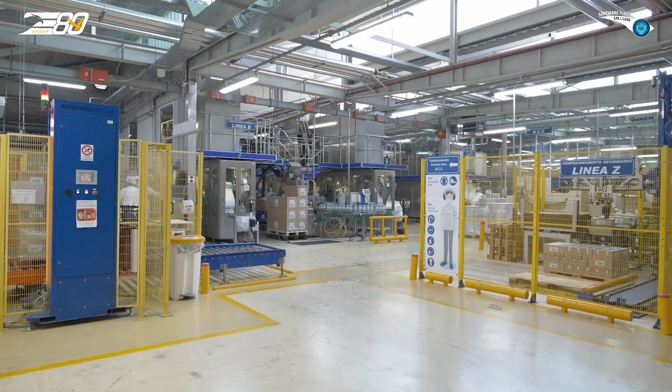The main objective of the project was to increase the production throughput with a flexible solution, integrated with our digital infrastructure, able to improve intralogistics efficiency, while also increasing the safety on site by reducing pedestrian-forklift mixed traffic. Additional challenges were to fit such solution in a rather small factory footprint, optimizing the use of existing space

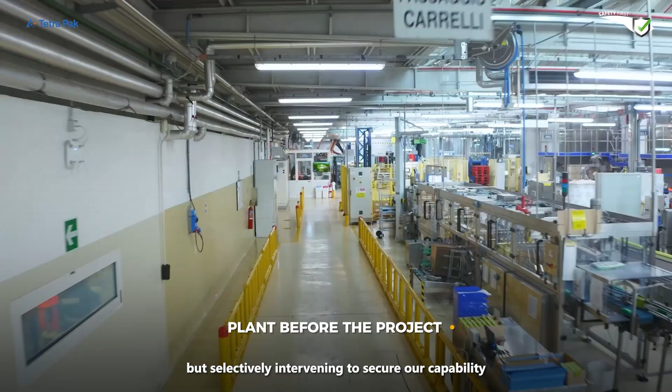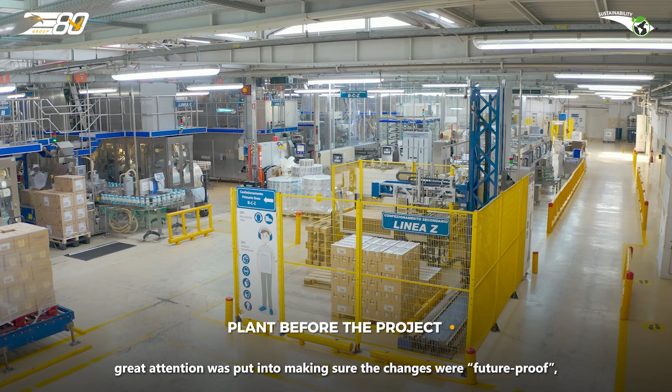and implementing the project without stopping production, but selectively intervening to secure our capability to keep serving our customers and consumers while transforming the site. It is important to highlight that during the design phase of the project, great attention was put into making sure the changes were future-proof, hence developing a layout able to sustain future growth in a logical manner.

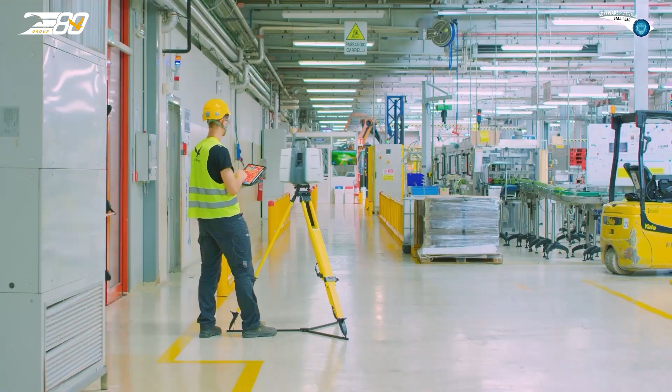Performance and efficiency improvement through innovation, automation and safety are the key elements that have driven the end-to-end solution project together with Abafoods. The complexity of the project needed an end-to-end teamwork involving our partner E80 Group since the preliminary study. Flexibility and adaptability to the situation were key to succeed.

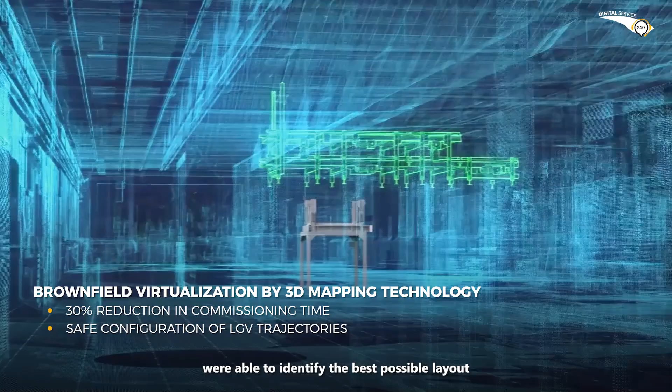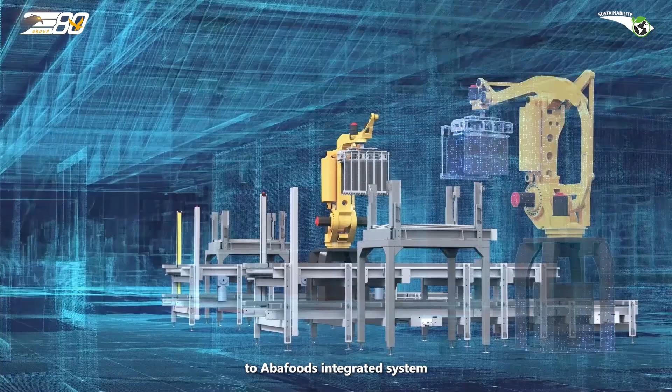The experience of our engineers, combined with the most advanced technology of 3D mapping, were able to identify the best possible layout. Besides, our collaboration with Abafoods and all the suppliers was key to deliver compact and efficient interconnected equipment to Abafoods' integrated system.

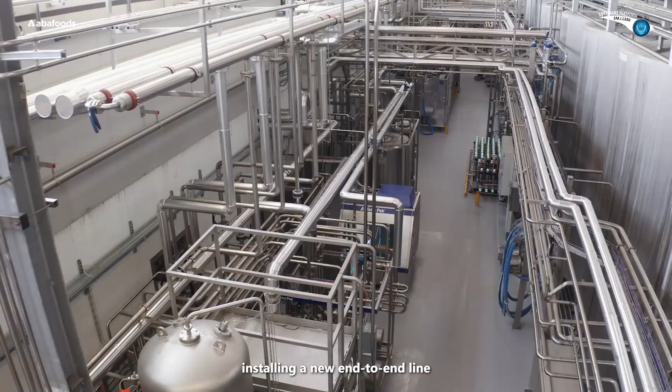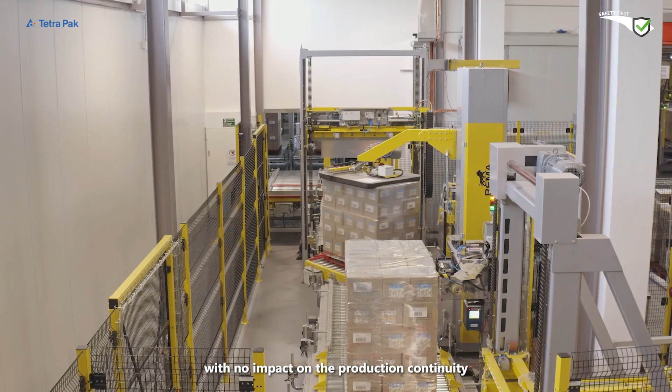We already prepared the plant for the installation of new future added lines for a customer like Abafoods, where we wanted to be the partner to support their growth ambition with our innovative, sustainable portfolio.

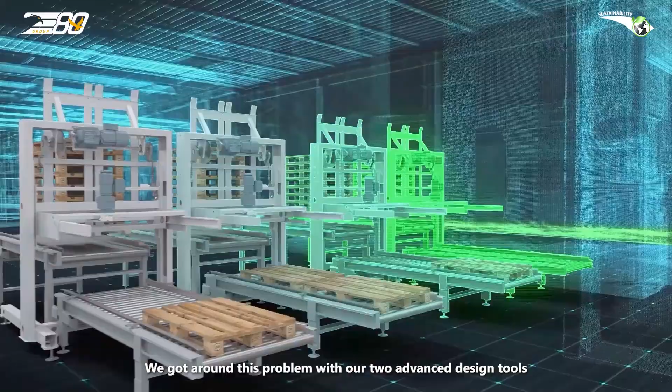With many similar projects, the main challenge is working in a brownfield plant, where the plant is not made to fit the solution, but the solution has to be made to fit the plant. We got around this problem with our 2 advanced design tools. The first thing we did when Abafoods gave us the go-ahead with the project was to 3-dimensionally scan the plant, obtaining a very precise digital representation.

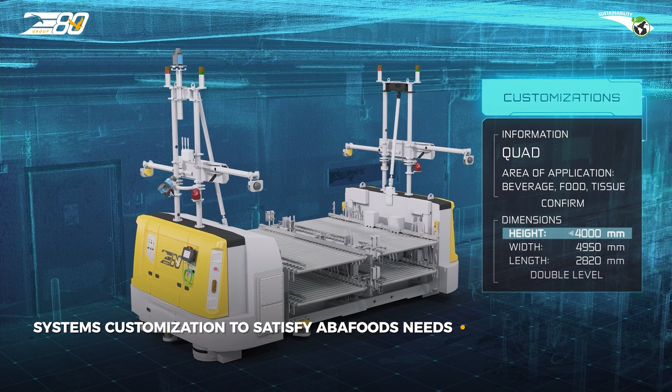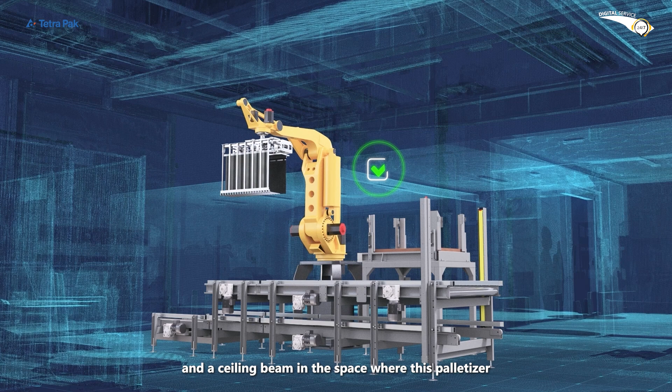This technology is extremely helpful when it comes to brownfield plants because it allows us to study in detail the existing space and create an accurate layout version of the customer factory. With 3D mapping, when we were in the design phase, we could already see that there would be a potential collision between a palletizer anthropomorphic arm and a ceiling beam in the space where this palletizer would have been installed. Our smart design tool offers additional benefits.

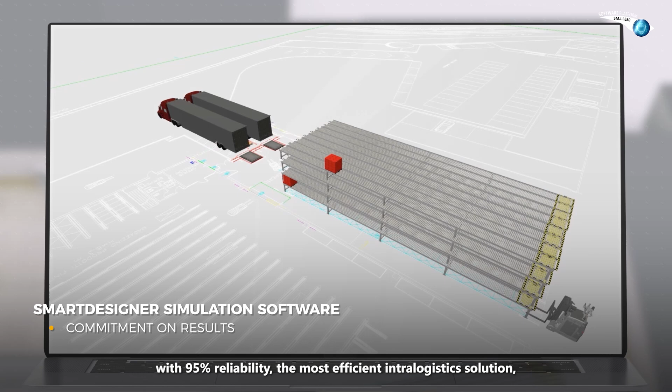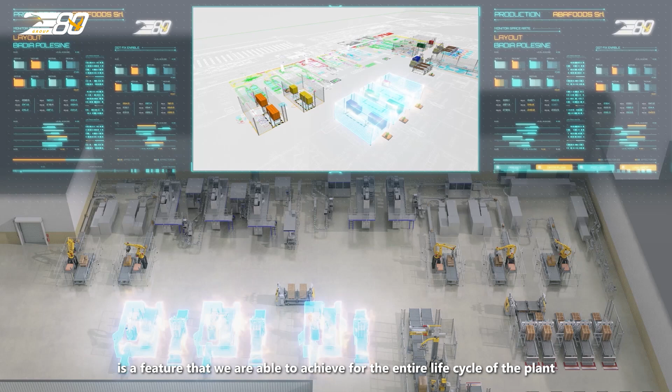For Abafoods, we simulated the flows of the factory, evaluating all operating scenarios, both current and future. A pressure test in the design phase allowed us to identify with 95% reliability the most efficient intralogistics solution, responding in advance to future increases in production and the next expansion of the plant. This commitment to system performance is a feature that we are able to achieve for the entire life cycle of the plant.

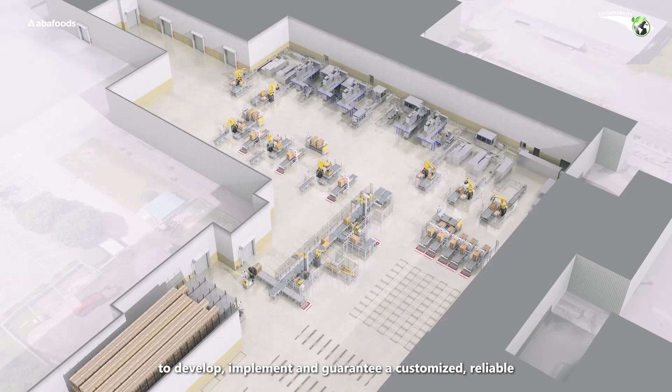These 2 tools have allowed us in the design phase to develop, implement and guarantee a customized, reliable and modular solution, optimizing the existing tight spaces. As for future modifications and expansions, with our increasingly innovative modular solutions, we can change and add solutions as if the factory were made of Legos. And all of it will continue to be optimized and managed by the LGV system and SMILE E80 software.

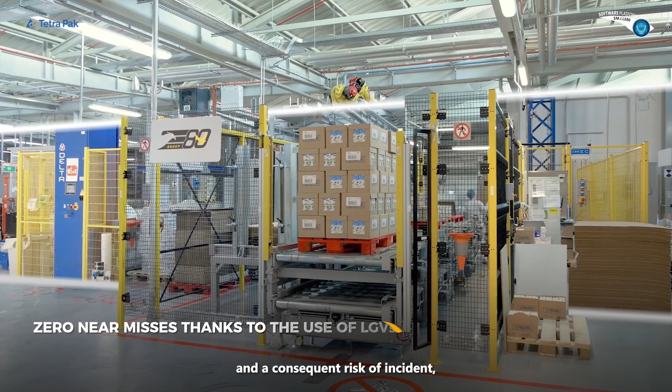All the different goals have been achieved by the project. The safety of our intralogistics system has been improved by using LGVs, laser-guided vehicles, which greatly reduce forklift-pedestrian interference and the consequent risk of incident, a risk that resulted in 11 near misses just in 2021.

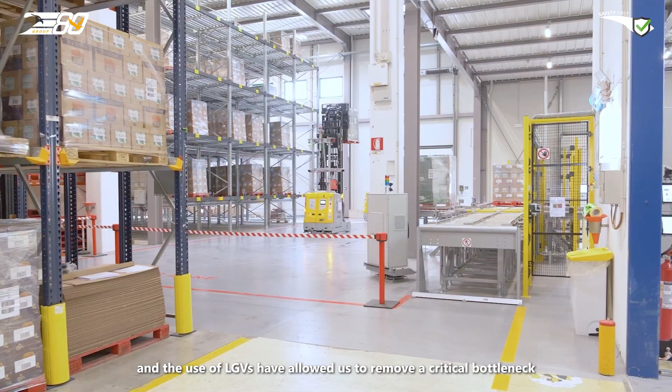Moreover, the re-layout designed together with E80 and Tetra Pak and the use of LGVs have allowed us to remove a critical bottleneck in the material flow that was caused by the forklift missions starting from the warehouse and going to the manufacturing hall to retrieve the finished products.

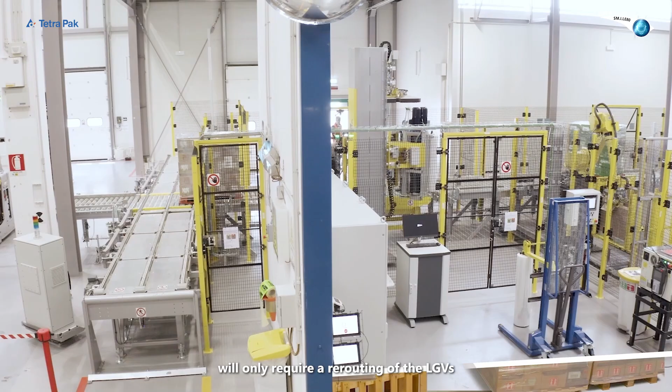The solution, designed by E80 in team with Tetra Pak and Abafoods, is also more efficient and more flexible, since any future increase in production lines or layout modifications will only require a rerouting of the LGVs instead of the dismantling or the building of floor anchor structures to move the materials. This leads to increased efficiency of all intralogistic operations and also to a reduction in our environmental impact.

As far as return of investment is concerned, I'll give you one piece of data. If it had been necessary for us to build a new production floor, we would have easily spent 5 to 6 million euros. However, by optimizing the existing space, thanks to the E80 Group studies and technology, we only invested 1.5 million for the infrastructure, and with the difference, we have implemented an automated and integrated intralogistics solution without ever stopping the production.